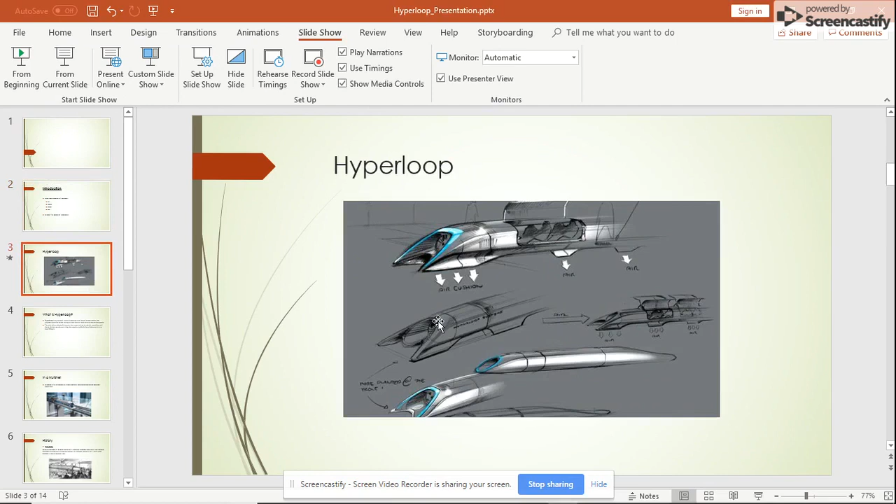Okay, so what are the four modes of transport that we know already? Those are air, water, road, and rail. Now let's look into the fifth mode of transport, the Hyperloop. This is one of the earliest schematics of Hyperloop designed by Elon Musk. So what is a Hyperloop? Let's answer the basic fundamental question.

This idea is not a very new idea in the sense that from the 18th century, humans have been using pneumatic tubes, or there were proposed ideas about vacuum tubes. But this is new in the sense that it doesn't just use those ideas, it builds on those ideas. So let's look at how this works.

This mode of transport is a proposed mode of transport for both passenger and freight transportation, which instead of using a vacuum tube, it's actually near vacuum - low pressure containers or tubes, which propel the passenger pods or freight transportation pods at almost airline speeds, theoretically close to 500 miles per hour.

Let's summarize Hyperloop. It's basically just a capsule full of people in a low pressure tube, which goes really, really fast. That, in a nutshell. To understand this completely, we have to go back in time a bit and look at the history of how these capsules were developed theoretically, or how these ideas were developed theoretically.

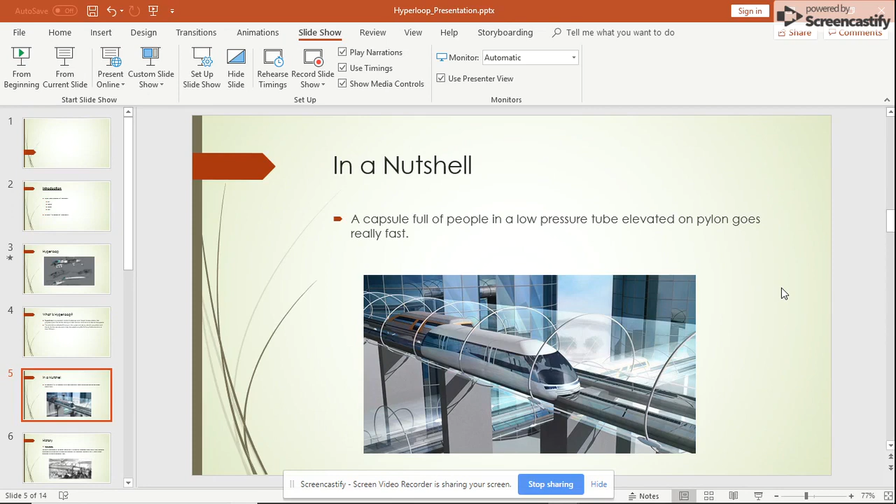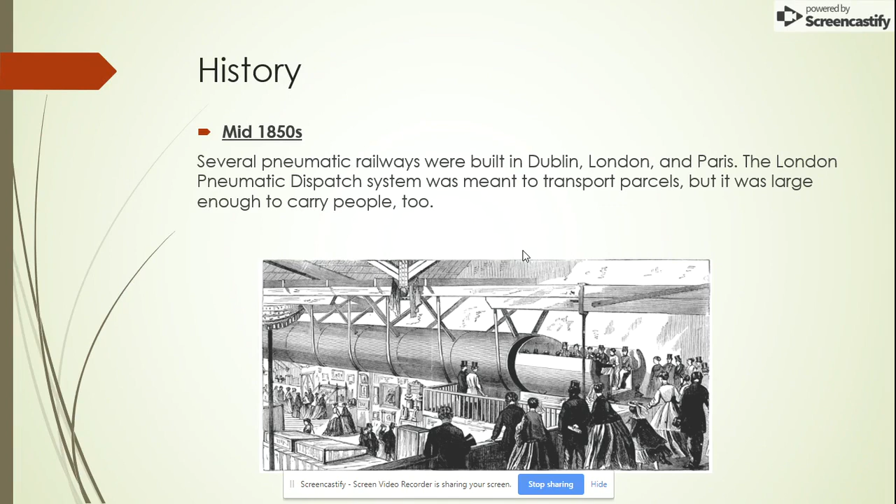Okay, so let's go back in history. Let's look at mid 1850s first. This was one of the very first times when a pneumatic railway system was built in several countries, in places like Dublin, London, and Paris. They were meant to transport parcels first, but since back in the day the technology was not really efficient, the size of the containers were actually large enough to carry people too.

Now let's go back in time - let's move on to the 19th century. There were several versions of pneumatic tubes from mid 1850s to the 19th century, but let's look at one of the major commercial uses for which they were built. By the end of the 19th century, once people were able to master building pneumatic tubes, they built large-scale pneumatic tubes for commercial applications, for transporting mail and other messages.

Now, I've used the word pneumatic tube a lot of times by now, so let me step back and explain what a pneumatic tube is. A pneumatic tube would be a container very close to vacuum, which uses compressed air for moving solid packages from place to place. It differs from a regular tube in the sense that usually when we say tube, it's used to transport liquids. Pneumatic tubes instead were used to transport solid packages like mail, etc.

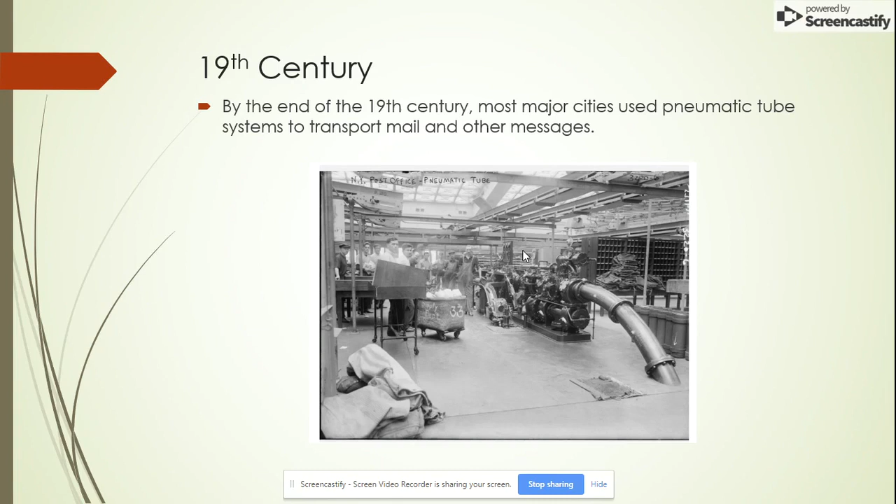And this is the 20th century - one of the very first models of using a tunnel or tube for large-scale transportation was theoretically proposed by a NASA pioneer called Robert Goddard. His idea was to create vacuum tubes. He theoretically wrote a paper on this idea in 1910 and estimated that if we were able to build a vacuum tube from Boston to New York, we would have been able to transport people in about 12 minutes, according to his theory.

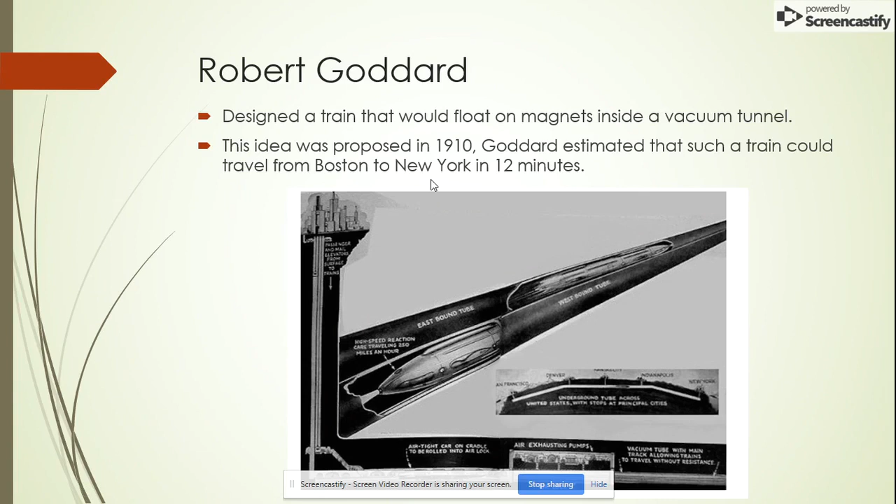Now moving on to the early 2000s, the next major application or proposal was put forward by ET3, a commercial company, which designed a small-scale pneumatic and maglev train, also built on similar principles to the pneumatic tubes we discussed earlier.

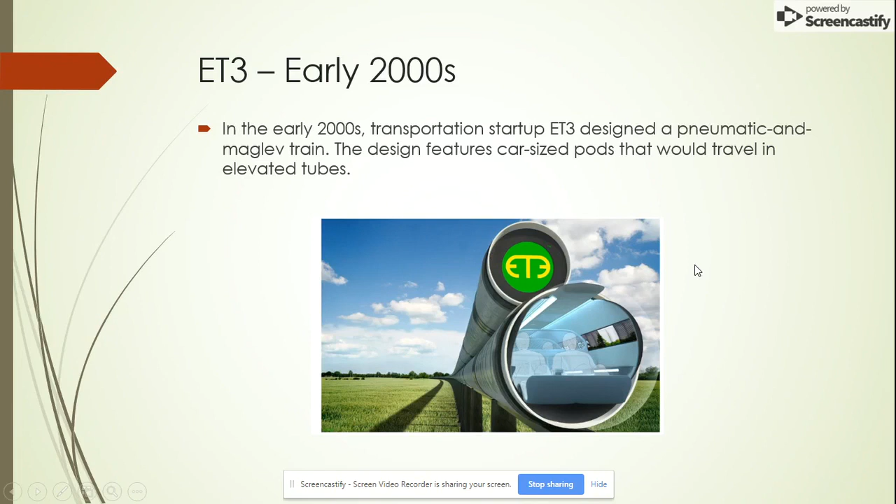So as you can see in the picture, the design features car-sized pods that would travel in elevated tubes. So it would not be on the ground; it would be at a much higher, elevated level than the ground.

Okay, now moving on to the present—let's say early 2012, 2013, when Elon Musk wrote his first white paper on Hyperloop. So essentially, we understand the history of how humans have evolved this technology, using compressed air for transporting mail, and then trying to prove that vacuum tubes would be a better alternative for transporting people from place to place.

So Elon Musk suggested this idea—he was inspired by all these concepts—using low pressure tubes to attain very high airline speeds, theoretically close to 500 miles per hour. That's because since we're using low pressure containers, there would be very little aerodynamic drag, which allows us to attain such high speeds.

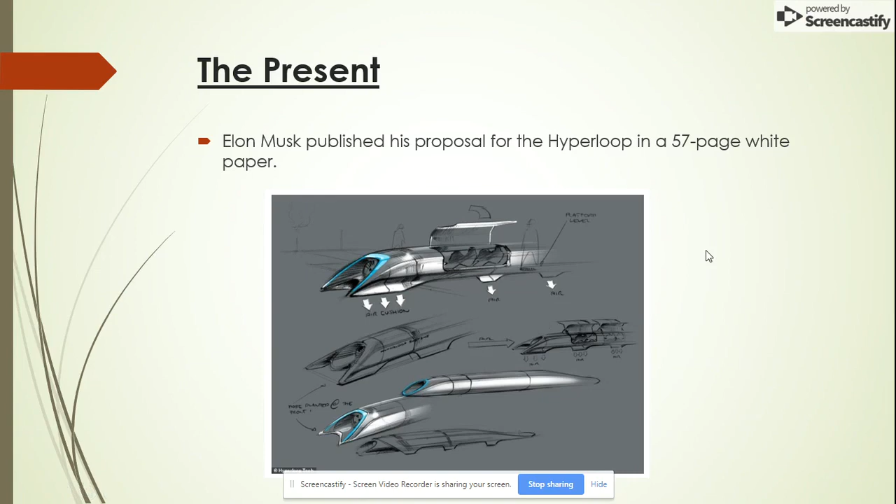To use an analogy in terms of road transport, very low aerodynamic drag is like very little friction. So essentially, we'd be going from Flintstones to Jetsons, attaining such high speeds. We've been evolving in terms of the transportation industry, moving on from this to this.

Okay, now let's look at the motivation behind developing this project. In about 2012, 2013, the Californian government accepted a proposal for a high-speed rail system between Los Angeles and San Francisco with about a 68.4 billion dollar budget.

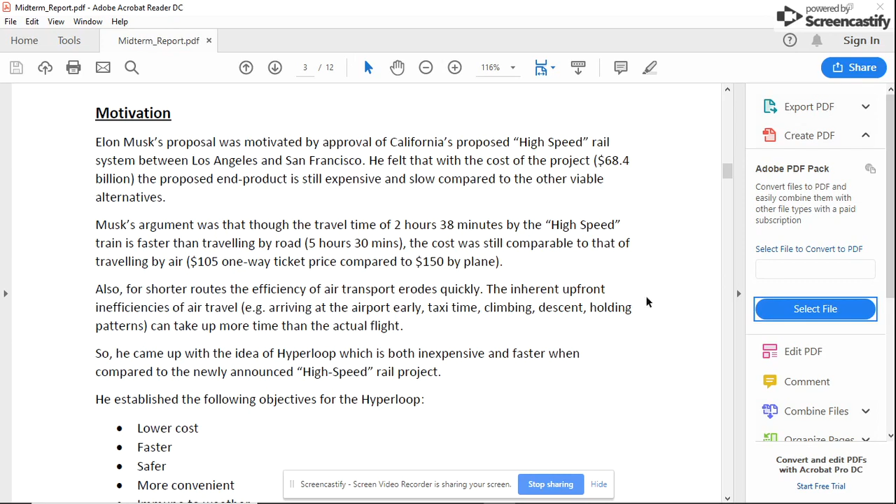After this was accepted, Elon Musk argued that with a travel time of about 2 hours 38 minutes by high-speed rail—although it appears faster than road transport, which is about 5 hours 30 minutes—the cost was still comparable to traveling by air. That is, you'd pay around $105 as compared to $150 by plane.

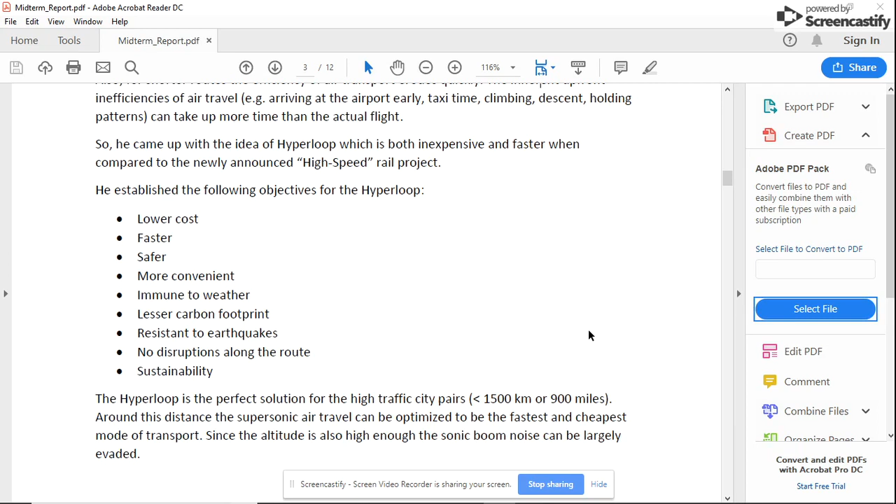So he argued that with a similar or much lesser cost, we could develop a much faster transportation system using low-pressure air containers, which reduces aerodynamic drag, and also wouldn't hinder the existing highway system because you could build this Hyperloop at a much elevated level.

So he established the following objectives for Hyperloop: lower cost, it has to be faster, it should be safer, more convenient, immune to weather—especially earthquakes—and have a lesser carbon footprint with no disruptions along the route.

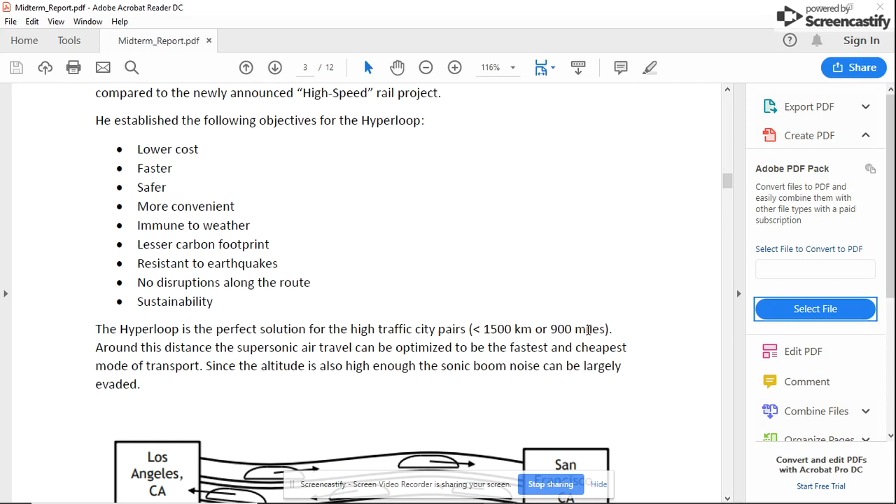This is explained by the fact that you won't disrupt anything. To build a rail, you have to disrupt the ecosystem and disturb the land where you lay the railroad, developing the railway system. Whereas for Hyperloop, you just use pylon levels and build tubes on top of them at a much higher elevated level, so it doesn't disrupt anything.

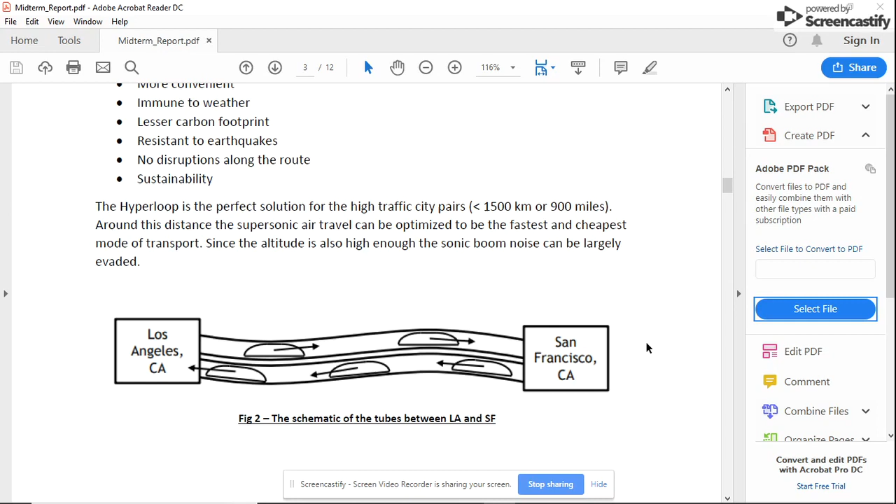And also sustainability—Elon Musk suggested in his first proposal that since there are solar panels built on top of these tubes, the whole Hyperloop can be self-sustainable. This is one of the schematics between San Francisco and Los Angeles, the first one developed.

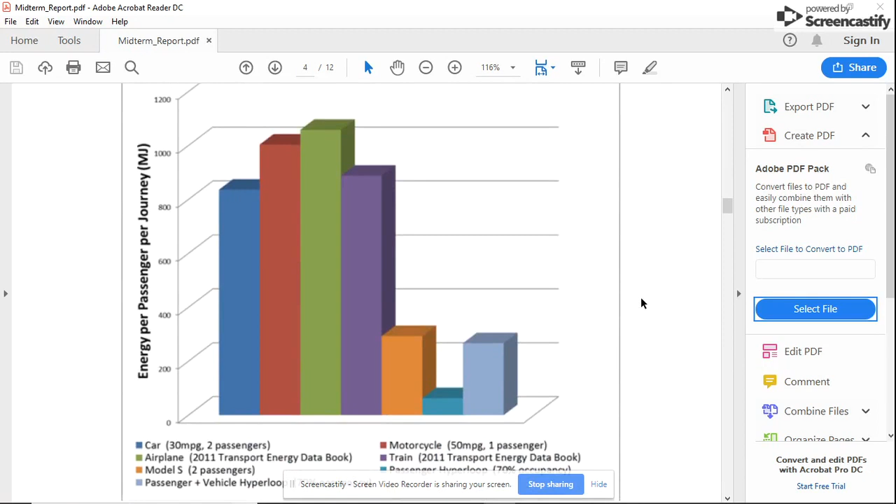Let's look at one more argument of his—if you look at the energy consumed per passenger, this graph explains it for the existing modes of transport: car, airplane, Tesla Model S, Hyperloop, train, and motorcycle. Of course, Hyperloop is still theoretical and a proposed mode of transport.

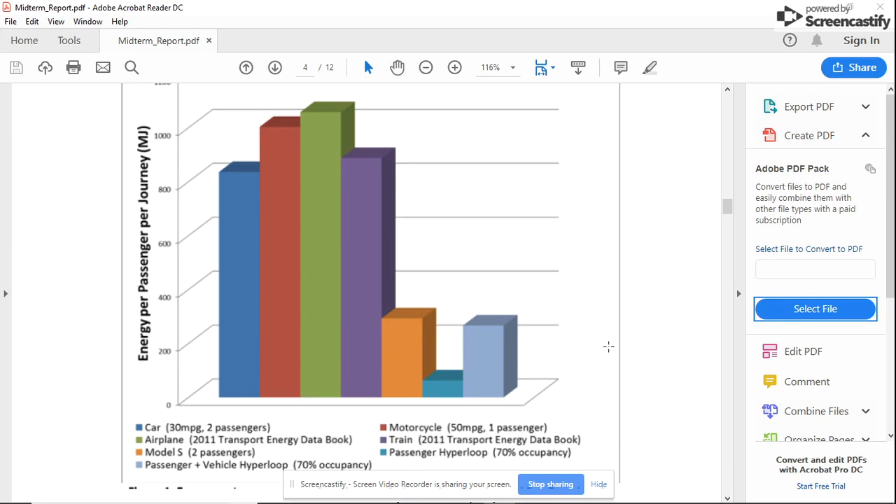If you look at it, the least amount of energy is occupied by the Hyperloop. This also proves that it's a much better mode of transportation in terms of energy consumed and lesser carbon footprint.

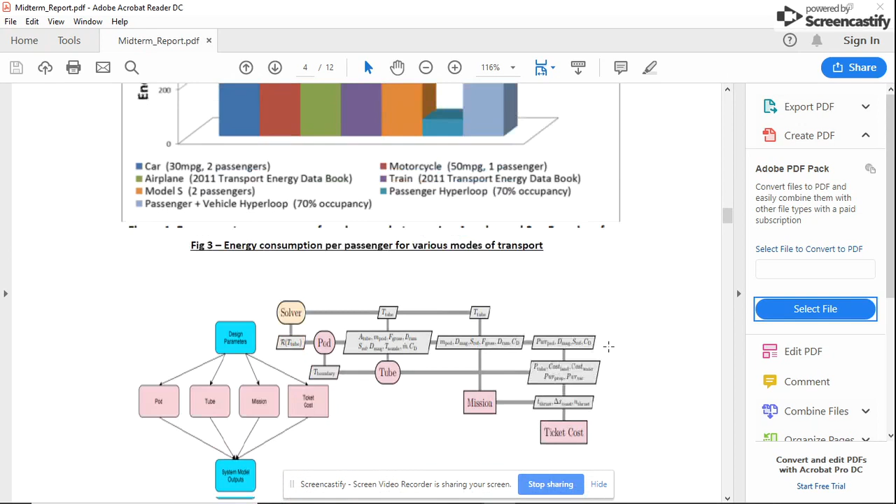And this is the top-level schematic of the Hyperloop. If you look at the design parameters, we need the pod, the tube, the mission, and the ticket cost.

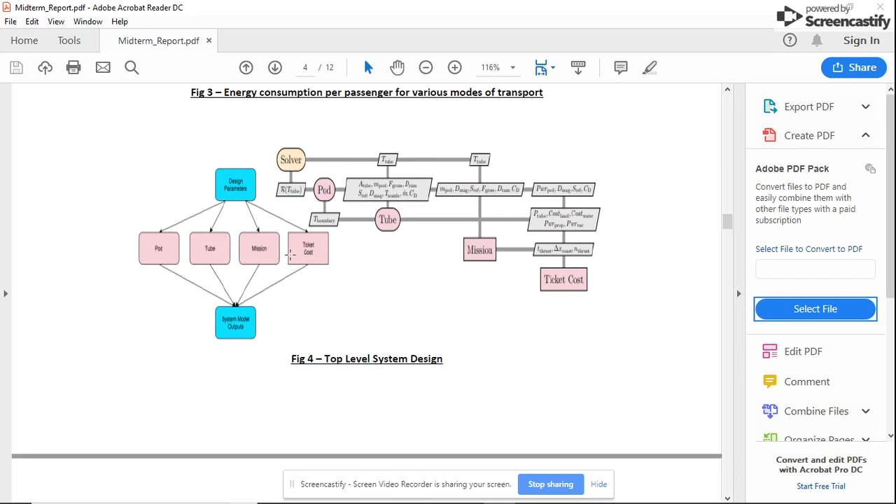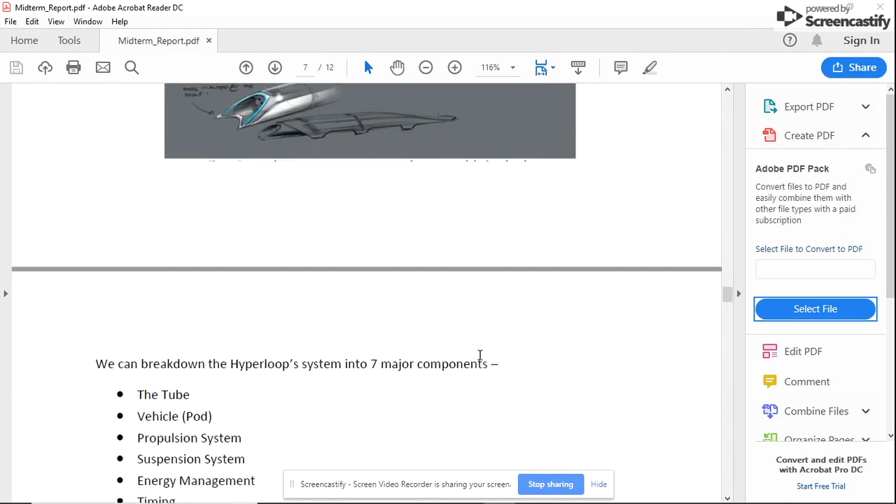Okay, now let's look at the working principle of Hyperloop—the idea and the basic working principle. We can break down the Hyperloop system into 7 major components, as you can see here: the tube, the vehicle or pod, the propulsion system, the suspension system, energy management, timing, and the route.

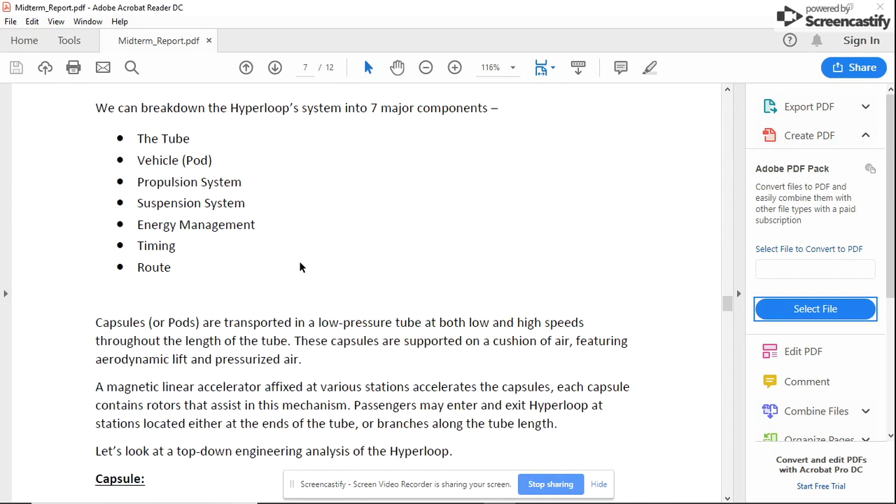Now, to sum it up—I'll explain these things in detail later—these pods are transported through a tube mounted on pylon levels, and the tube is built on the pylon levels, which also has solar panels on top of it.

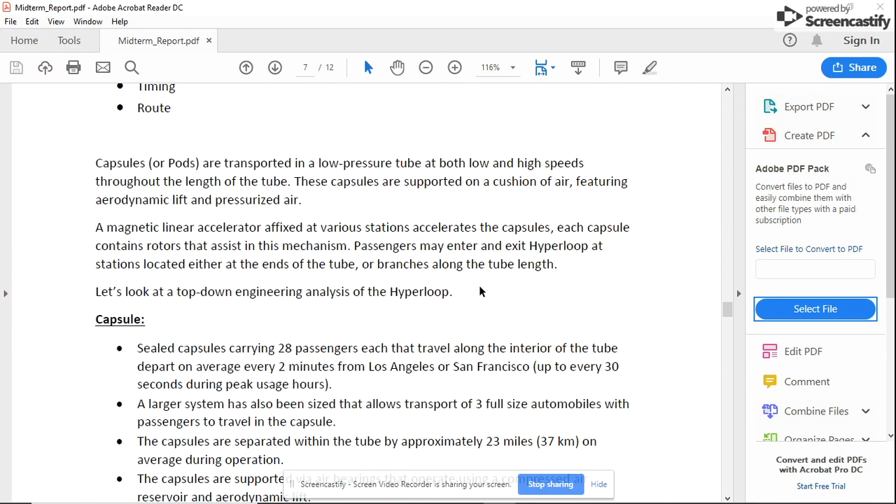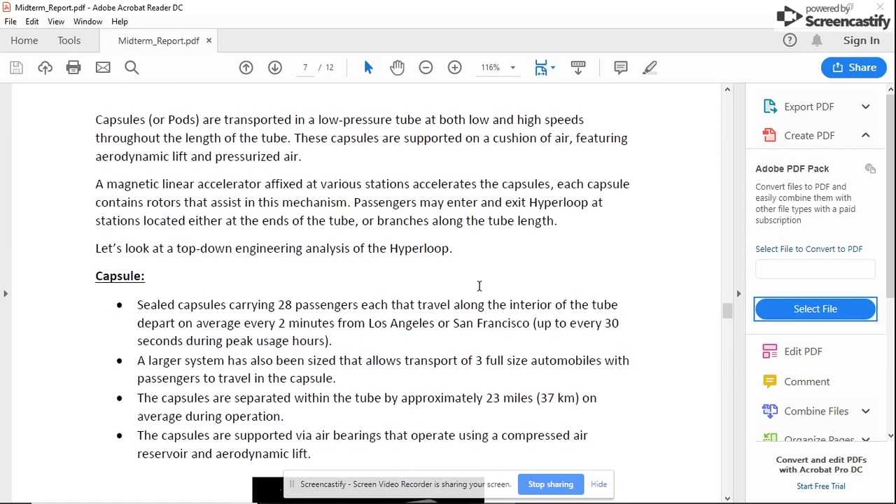So these capsules are transported in this low pressure tube at very high speeds, and also to reduce speed, at a lower speed. These capsules are also supported by a cushion of pressurized air, which has very little aerodynamic drag. So how does it accelerate?

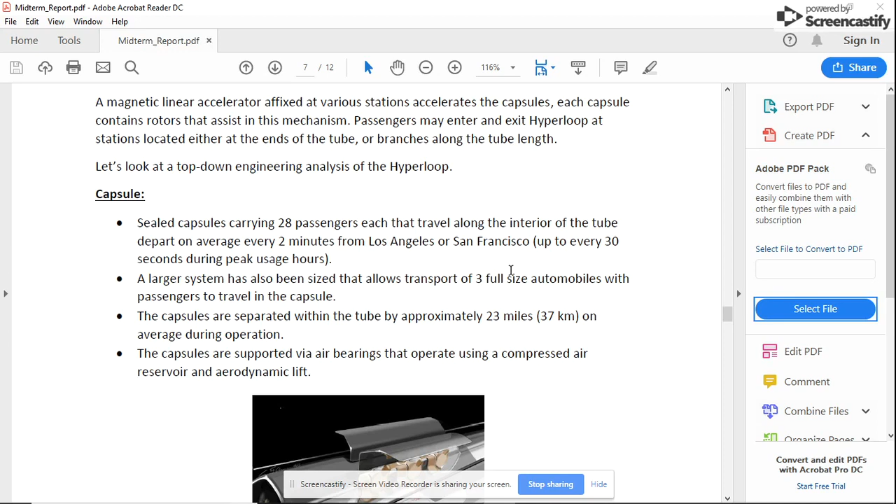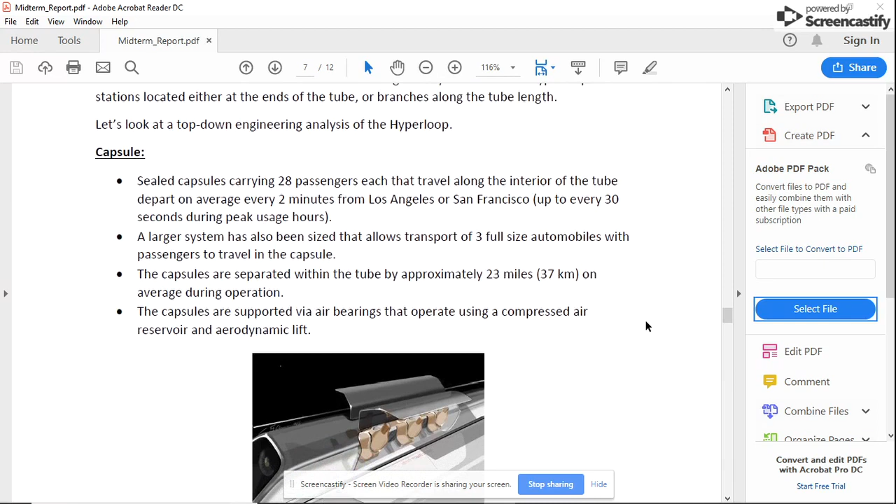A magnetic linear accelerator is fixed at various stations, and these passenger pods have rotors inside them which assist in this mechanism. So let's look at these individual components, a top-down engineering analysis of Hyperloop.

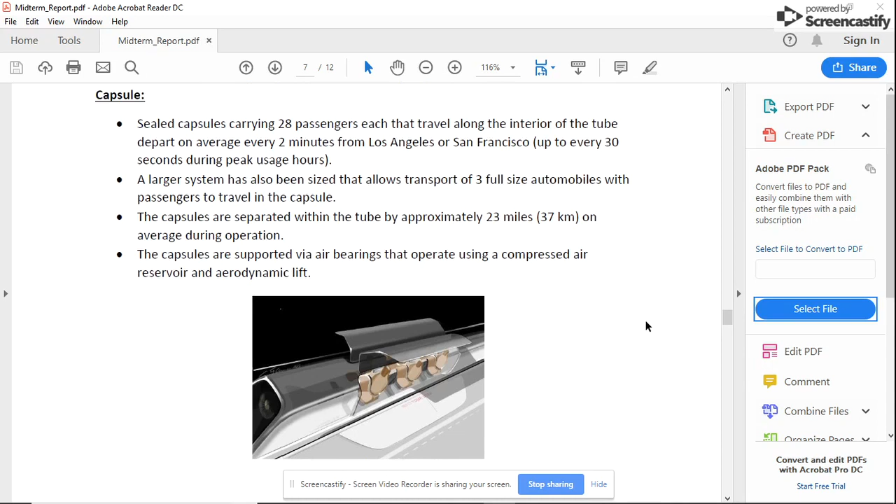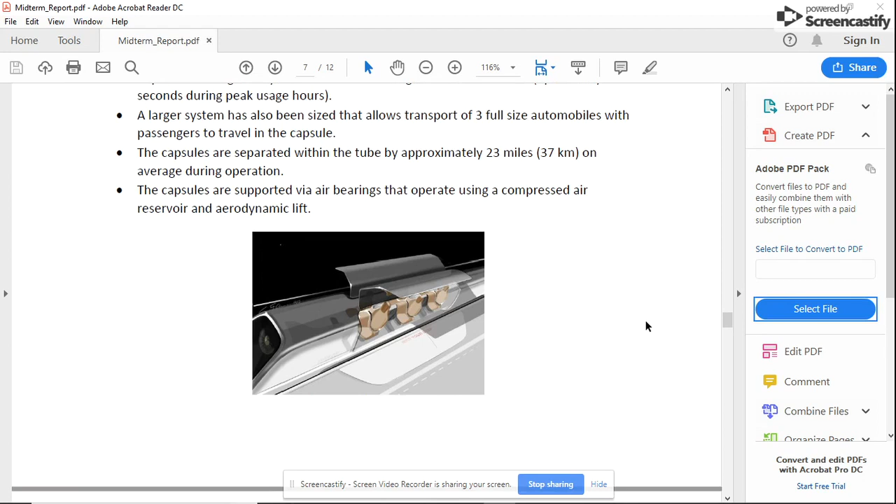First, the capsule. The first proposed design idea was that it could carry about 28 passengers along the interior of the tube, and a Hyperloop pod would depart every 2 minutes from Los Angeles to San Francisco. Each capsule or pod would be separated by about 23 miles on average during operation. The capsules are supported via air bearings.

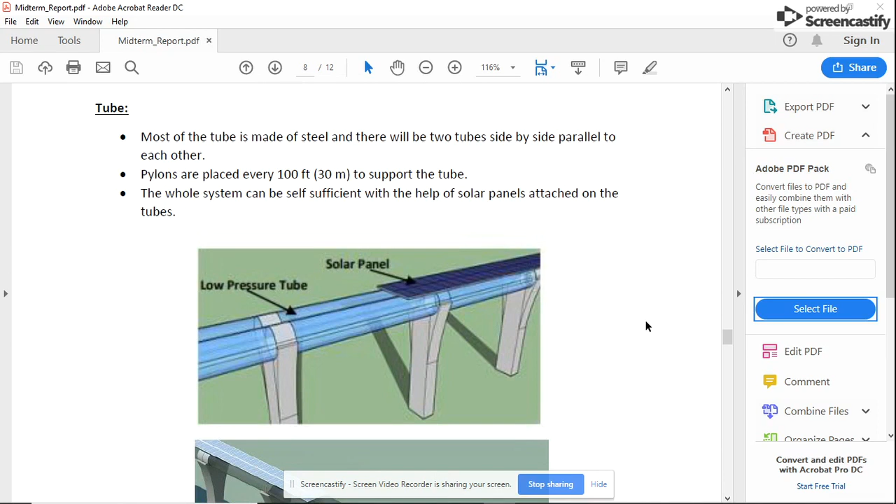Next, the second most important thing, the tube. This tube is made of steel, and in the first track between LA and SF, there are two tubes which run side by side and parallel to each other. The pylons are placed every 100 feet, as shown in the picture here, to support the tube. The whole system can be self-sustainable because of the solar panels attached on the tubes, using solar energy.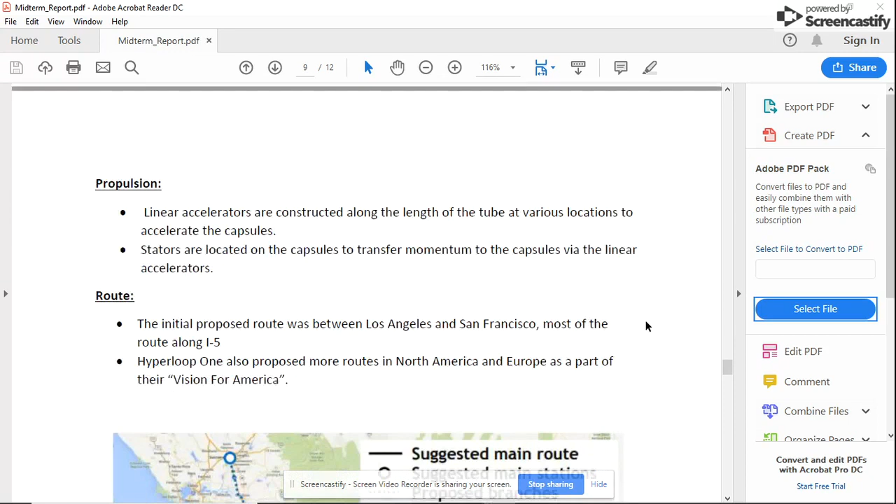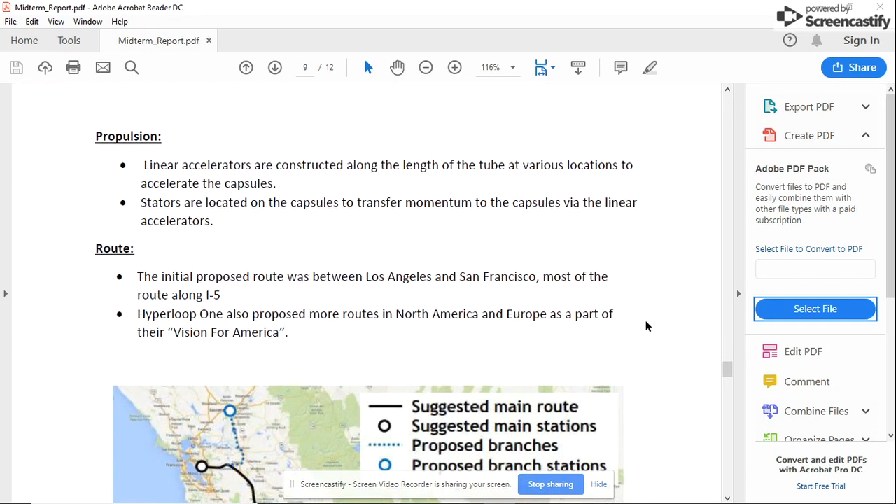Propulsion system. I already explained how the acceleration works, using the stators inside the pod and the linear accelerators at each station along the length of the tube, which assist in the acceleration of the capsule.

All right, now we learned about Elon Musk's vision and SpaceX's initial designs on Hyperloop. I would also like to speak about two more companies, Hyperloop Transportation Technologies and Hyperloop One, which also picked up this idea after the first white paper and started developing initial versions of the Hyperloop.

Last year, Hyperloop One was able to successfully test the first version of Hyperloop on about a 500 meter track, attaining speeds of about 250 miles per hour, which is not yet as quick as proposed in the paper, but it's a really good start, and it is sustainable up to 500 meters, so it can be built further.

Now, Hyperloop One announced their vision for North America in their conference last year. Since they're able to successfully complete phase one, they're talking about the plans of the next phase, building these Hyperloop tracks all over North America by 2030.

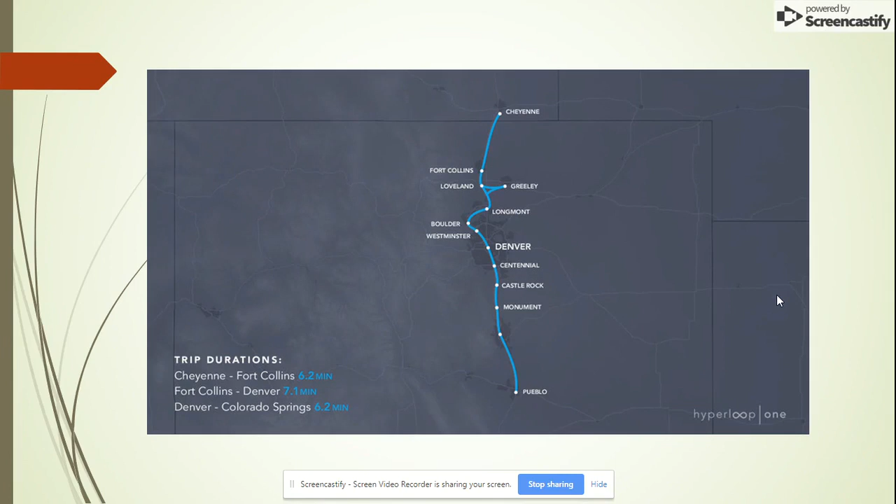This is a really exciting phase ahead, because if you look at it, Boston to Somerset would only cost 5.3 minutes. Similarly, Denver to Dallas, 73 minutes. Chicago to Columbus, about 29 minutes. Fort Collins to Denver in about 7 minutes. Dallas to Austin in about 20 minutes. Los Angeles to San Diego in 12.5 minutes. Seattle to Portland in 17.2 minutes.

So if Hyperloop One, Hyperloop Transportation Technologies, or SpaceX for that matter, any one of these companies is able to pull it off, and make this fifth mode of transport a commercially viable application for passengers, if it suits the demographics, if it works with economies of scale, it is a really exciting time ahead. So I end my presentation here to conclude.

So what we did today was basically understanding the basic principles of Hyperloop and how, throughout the history of humanity, we've been able to evolve the ideas of transportation. This time is really exciting because we are able to achieve about 250 to 300 miles per hour in testing right now, for about a 500 meter track length.

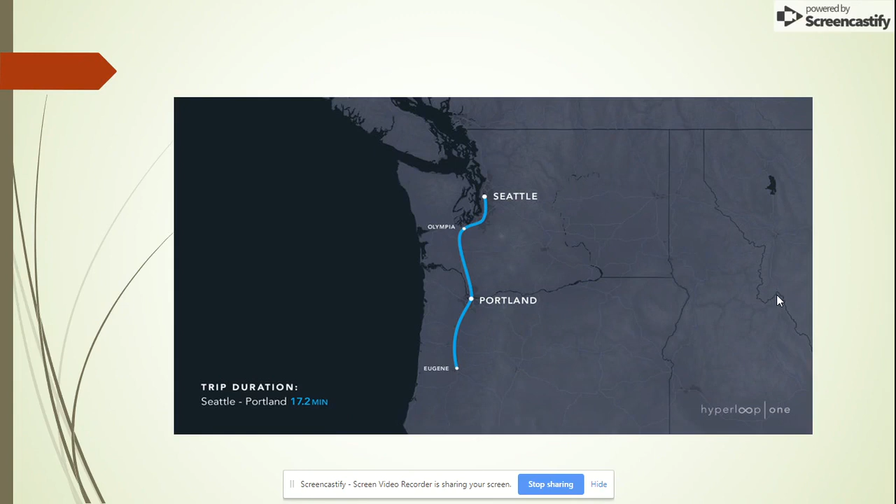SpaceX is actively launching the Hyperloop contest every year, in which a lot of students from prestigious universities take part. It's really exciting times ahead if you're able to build at least a commercially viable application for humans. Thank you.

Till now, we have discussed what Hyperloop is and historically how it was designed, keeping in mind the earlier designs of pneumatic tubes and Robert Goddard's first implementation of vacuum tubes. Now let's discuss how it actually works and the engineering challenges it faces right now. Theoretically, the idea has been developed and reiterated multiple times, and we have white papers from Elon Musk, Hyperloop Transportation Technologies, and Hyperloop One. But practically, where does it stand right now, and what is the future? Let's discuss that.

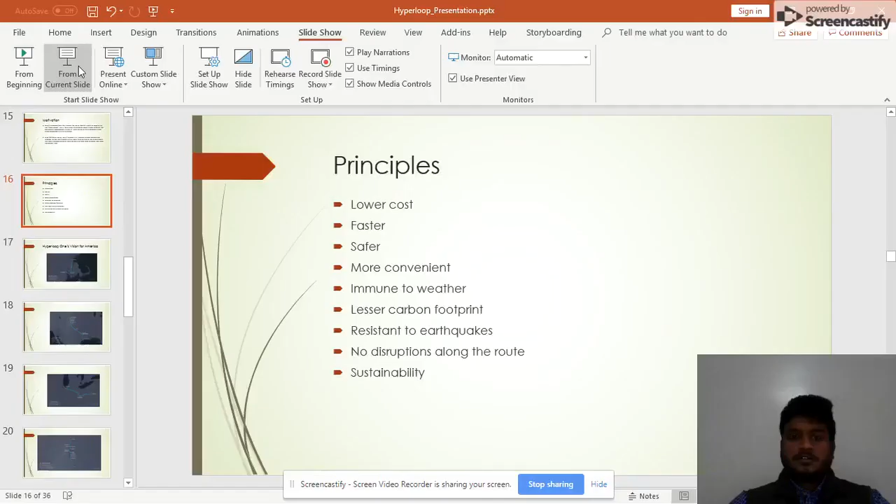Now let's discuss the principles, and then let's see what challenges the model is facing with respect to these principles, and also what the current development stage of Hyperloop is.

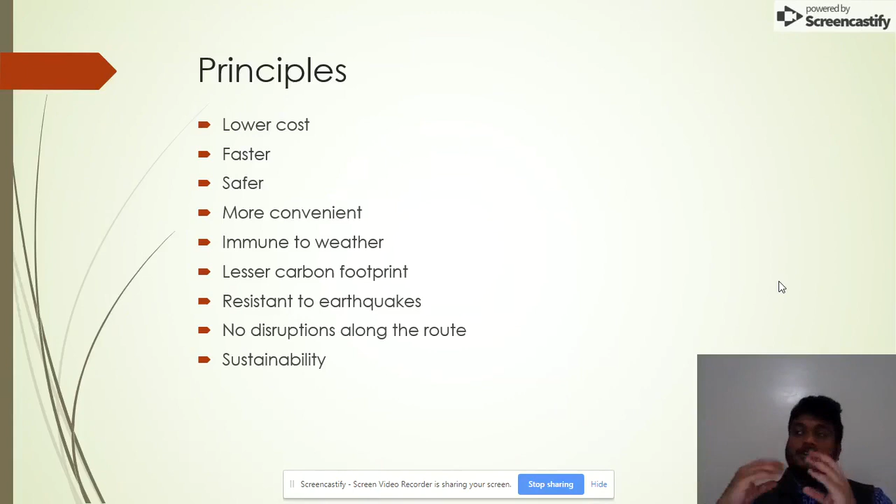Now, when we discussed initially how it compares with existing modes of transport, we said one of the main USPs of Hyperloop is the lower cost, quicker mode of transport, and a more convenient approach, along with a lesser carbon footprint since we're just using air jets to levitate it inside the tube. Across the whole length of the tube there are solar panels attached, so it's much more efficient and contains a lesser carbon footprint compared to other modes of transport which have much higher carbon footprints.

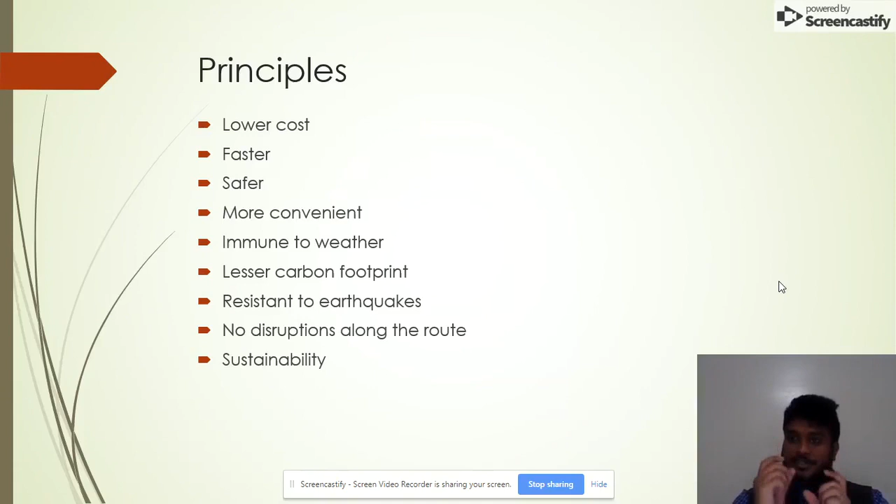Next, it's resistant to earthquakes because the pylons, the stands along the length of the tube, are spaced apart and can withstand tremors. Whenever there is an earthquake of a lower Richter scale, they can withstand that pressure and the tremors onto the tube. And the next point is sustainability, which we discussed.

This is again with respect to how to energize the tube, that is, generating power based on solar energy, which is a renewable source of energy.

Okay, now how does it work? Let's answer the basic question. We can say Hyperloop is a cross between a Concorde, a railgun, and an air hockey table. The reason I say that is the Concorde, when it was invented, was one of the fastest and most revolutionary modes of transport. A railgun uses electromagnetic forces to transport objects, and an air hockey table is known for reduction of air friction. If you've played on an air hockey table, you know how easily you can slide across it, because it has almost no sliding friction.

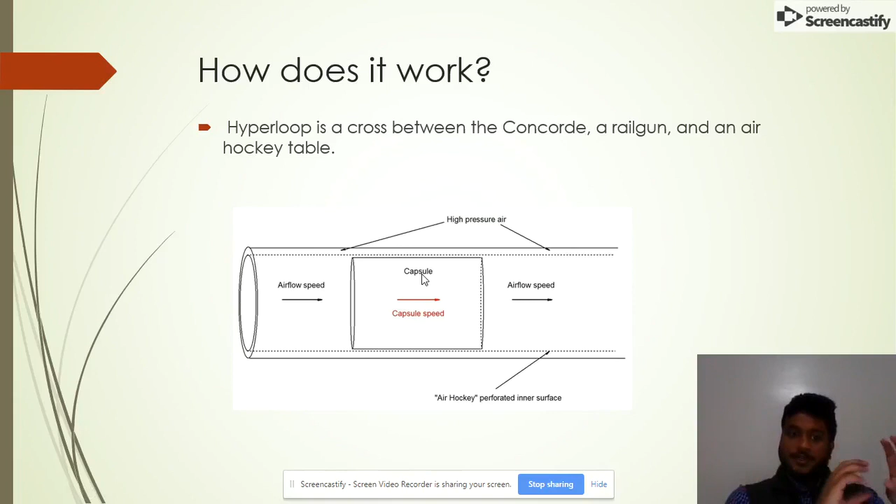The next important detail is that the tube is not exactly vacuum, but does contain a very little amount of air, or highly compressed air. This also acts as a cushion to prevent two capsules from colliding within the tube. I mention this because the journey time is short, and there's about a 10-minute gap, with vessels running at 10-minute intervals. It's very important to prevent collisions, and the compressed air in between the capsules acts as that cushion.

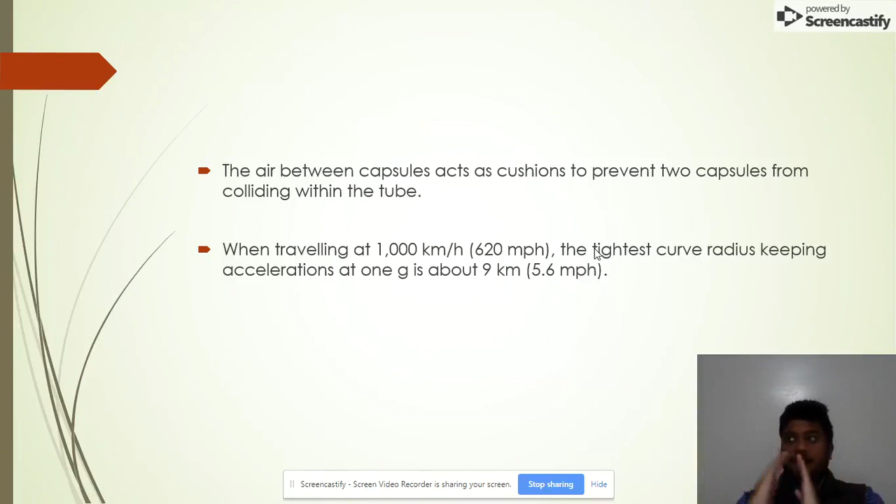The next important point is that we discussed earlier that pretty much the whole length of the track has to be fairly straight, with no curves. That's because the tightest curve radius, keeping the acceleration at 1 g, is about 9 kilometers. So if you want to have a curve, the radius has to be 9 kilometers, which is huge. You can't really have track bending or immediate curves because of the speeds of the vessels.

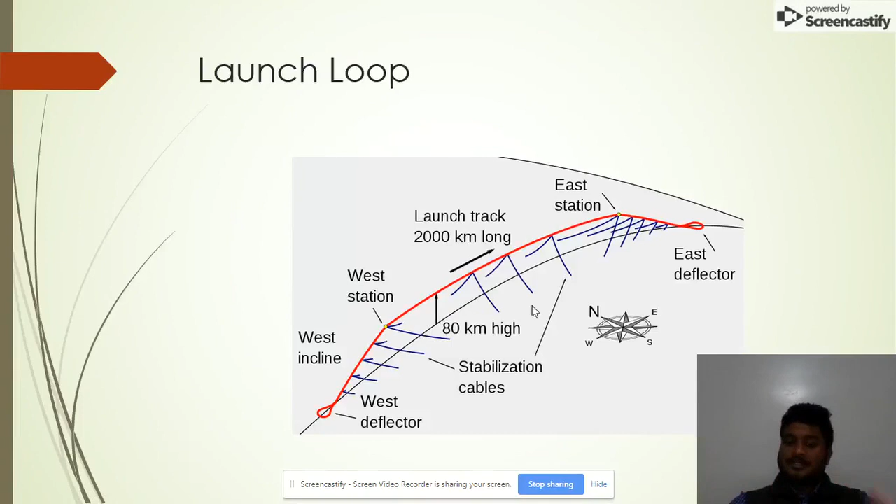Before we discuss the challenges, practical limitations, geographical limitations, and engineering challenges faced at present with respect to Hyperloop, I'd like to go over one of the iterations of Hyperloop called the Launch Loop. You can see there are some differences here—the height of the tube is about 80 kilometers, which is a lot more than Hyperloop. Also, instead of steel pylons erected to support the structure, we have stabilization cables, similar to the suspension cables you'd see on suspension bridges.

Okay, let's go to the challenges now. As I said earlier, theoretically this model works and it's going to revolutionize the transportation industry as a fifth mode of transport. But let's look at the current state of the Hyperloop experiments being performed by Tesla, SpaceX, Hyperloop Transportation Technologies, and Hyperloop One, one of the leading companies in development of Hyperloop.

The current state of Hyperloop One is that they have built a 250-meter tube in Nevada. The length of the tube and the size of the track is about 250 meters, and they've been able to achieve speeds up to 240 miles per hour. This is part of their new goal called Vision 2030, and I'd like to show you a video.

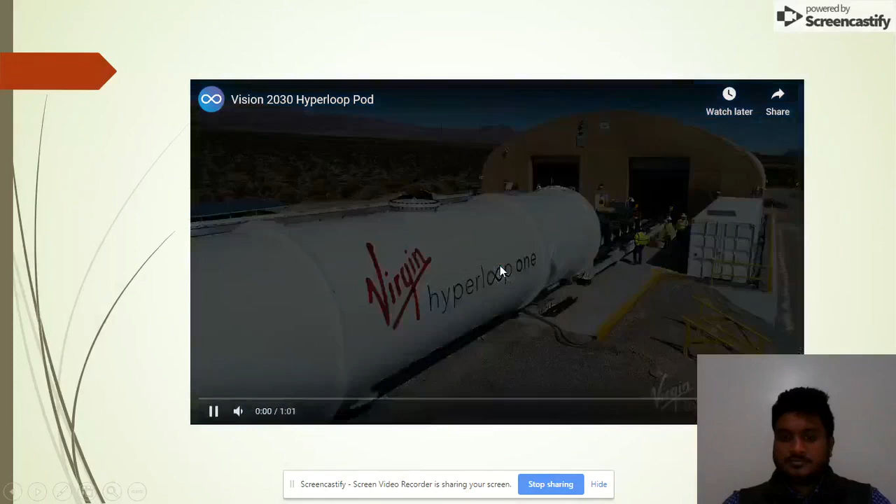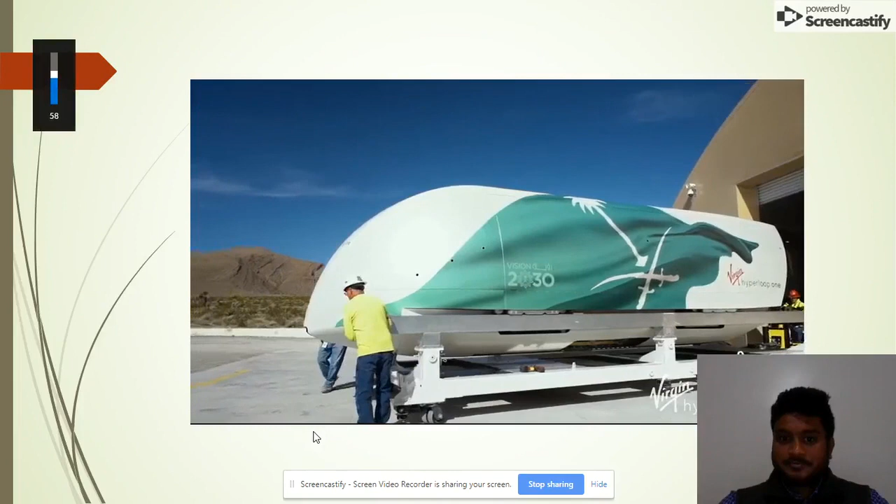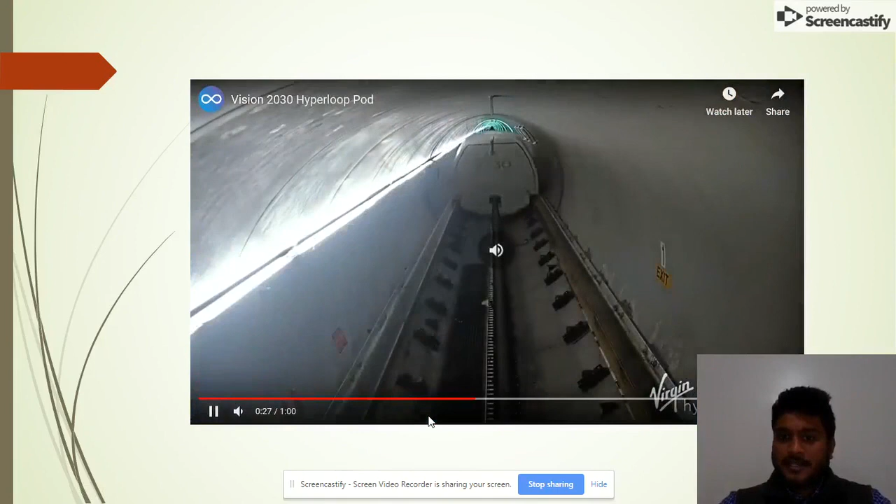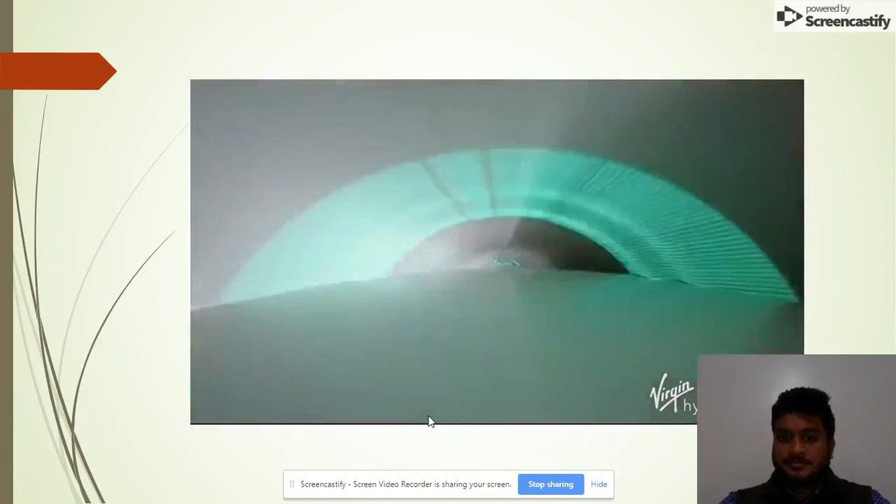This is a part of Virgin Hyperloop One's Vision 2030 in Nevada.

As you can see, their experiments have been successful, and they've been able to successfully accelerate and decelerate the pod within the length of the tube. This video was released as part of their phase one of Vision 2030. Right, so since the size of the track is small, even though the experiment and phase one are successful, the current implementation of Hyperloop is still small scale—there are no large tracks available. So that's the major question: is constructing a perfect tube hundreds of kilometers long, capable of sustaining near-perfect vacuum, even possible?

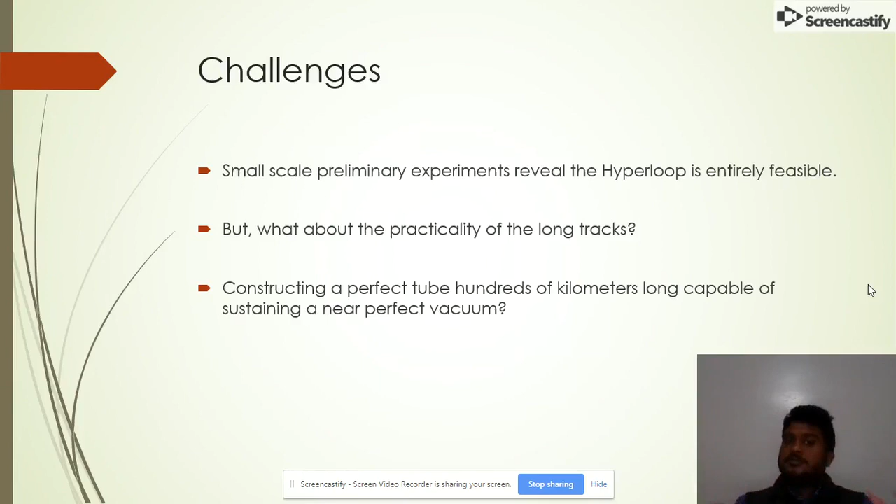Another issue the structure would face, which I'll elaborate on later, is thermal expansion. This is because temperatures change throughout the year, and different parts of the track are exposed to different amounts of sunlight and experience different temperatures. So you'd have the tube expanding, reducing in size, or bending.

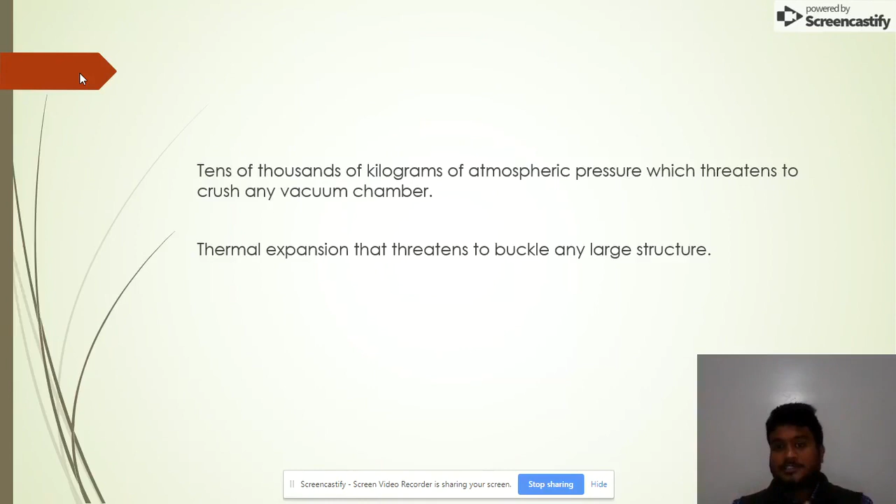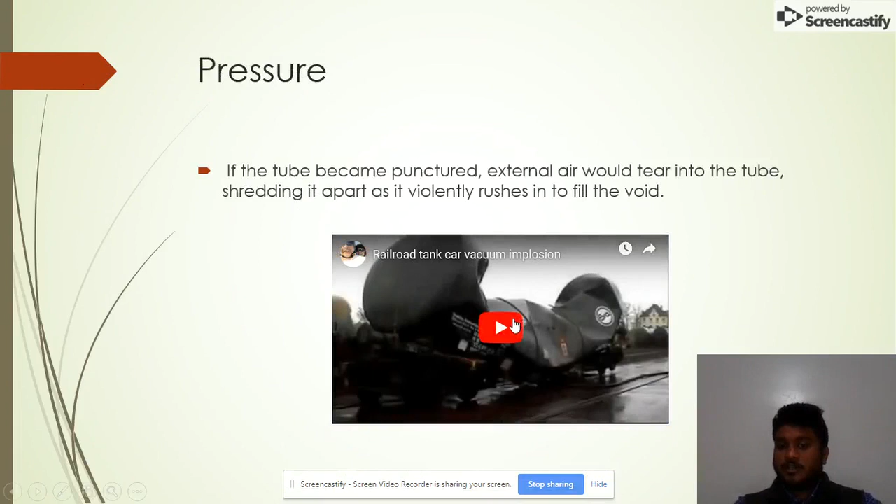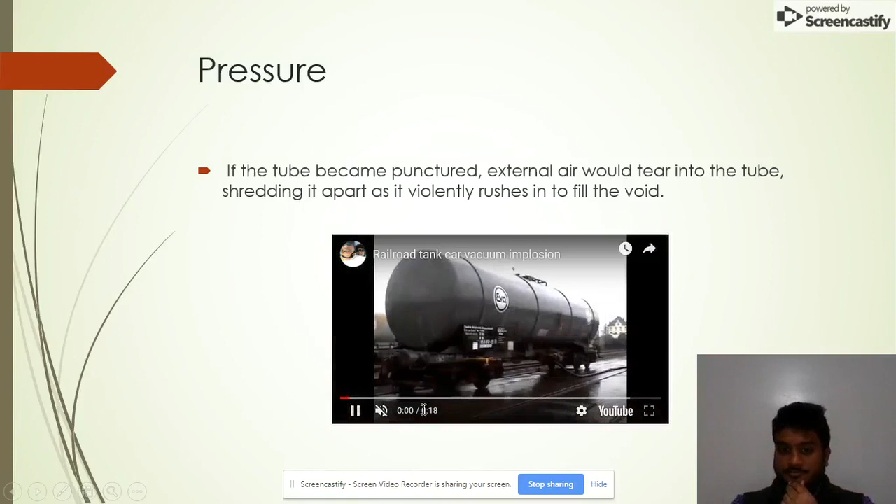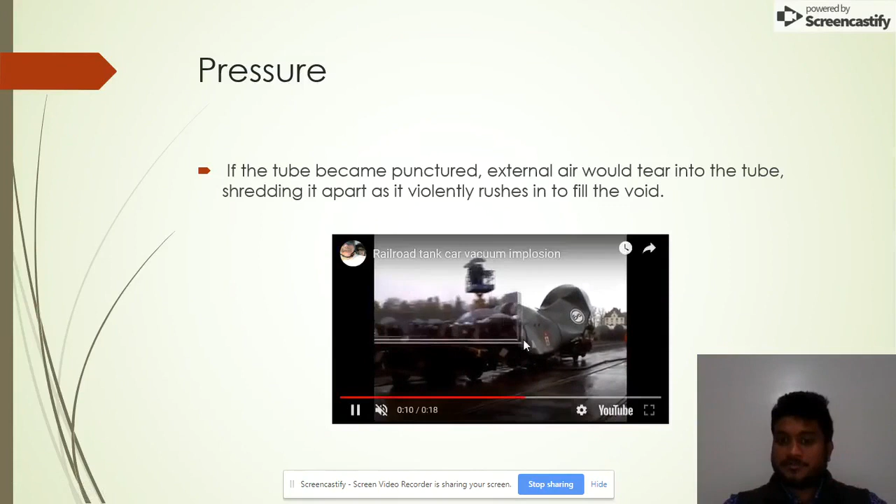Now, elaborating on my first point, I'd like to show a video of what happens when a body experiences such amounts of pressure. This is an experiment performed on a railroad tank car. As you can see, it completely gets crushed due to the lack of pressure. The whole tube gets punctured, and as soon as there's a difference in pressure, the external air tears into the tube and completely shreds it apart.

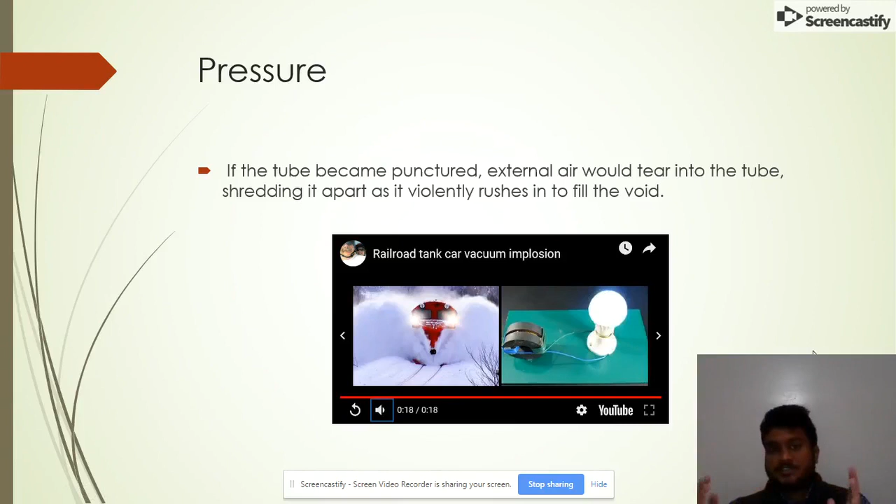So what would be the next major issue? We'd have vessels traveling and arriving at stations at a frequency of 10 to 20 minutes, so there would be constant motion of vessels in the tubes. If there's a collision, and since speeds have theoretically been proposed at around 600 miles per hour—but even practically we've seen speeds around 300 miles per hour—at those speeds, collisions would be completely fatal and would also result in spontaneous decompression.

I'd like to show an example performed by Purdue technology students, in which they accelerate and show how a ping pong ball—completely non-lethal—can become lethal due to the decompression of air when it attains supersonic speeds.

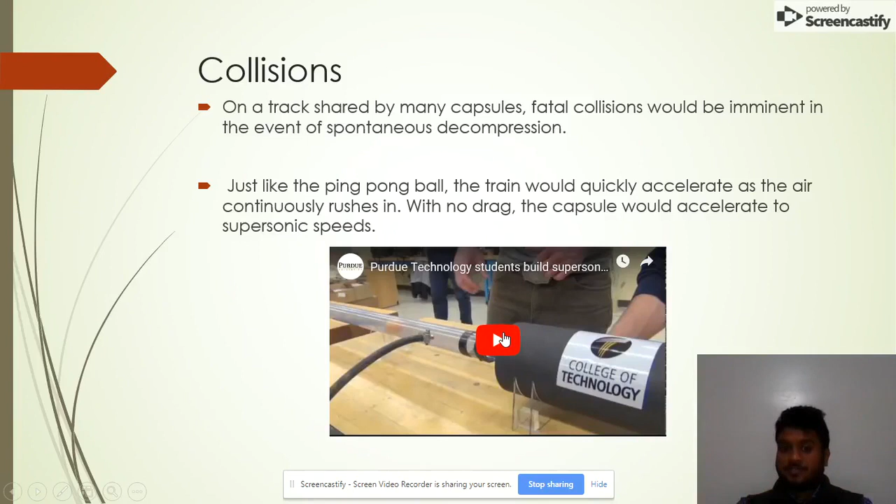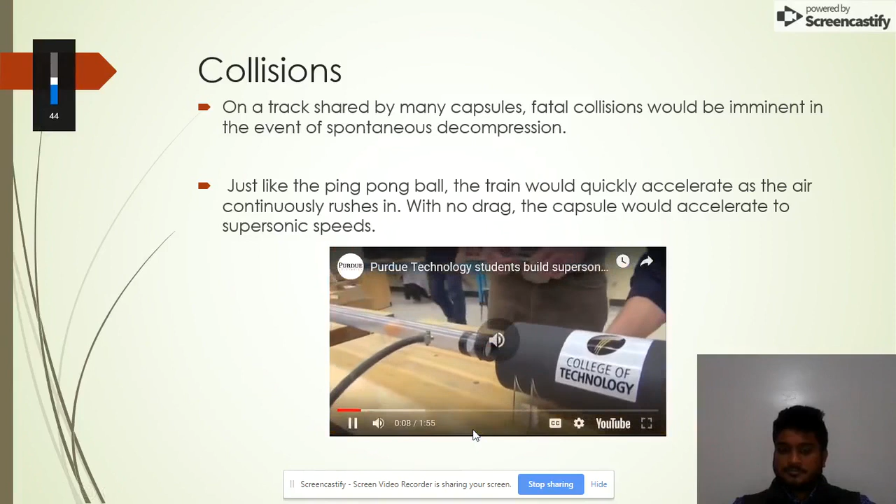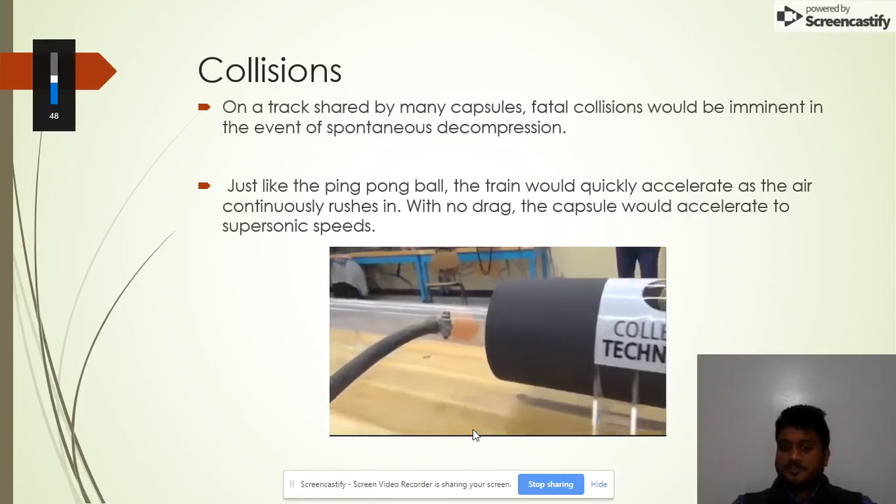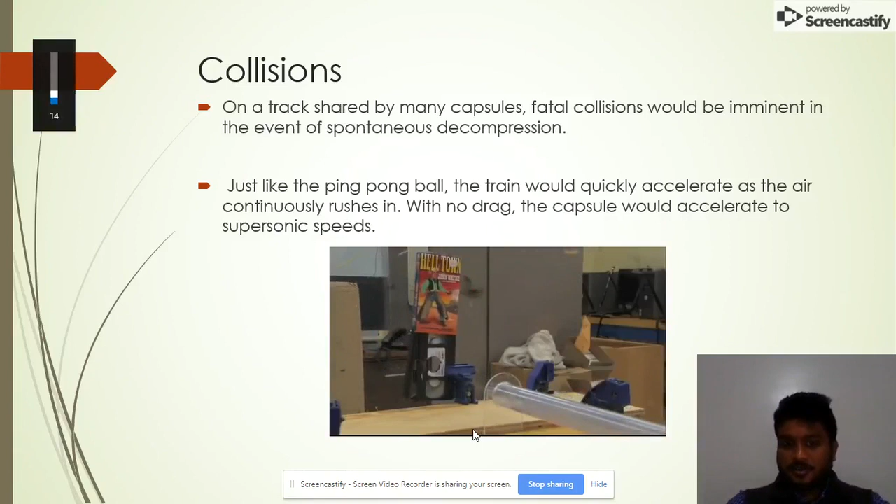Yes, so they take an example of a supersonic wind tunnel. As you can see, they're drawing the air out, and creating almost a complete vacuum in the vessel. The pipe you see here is almost vacuum, as you can see.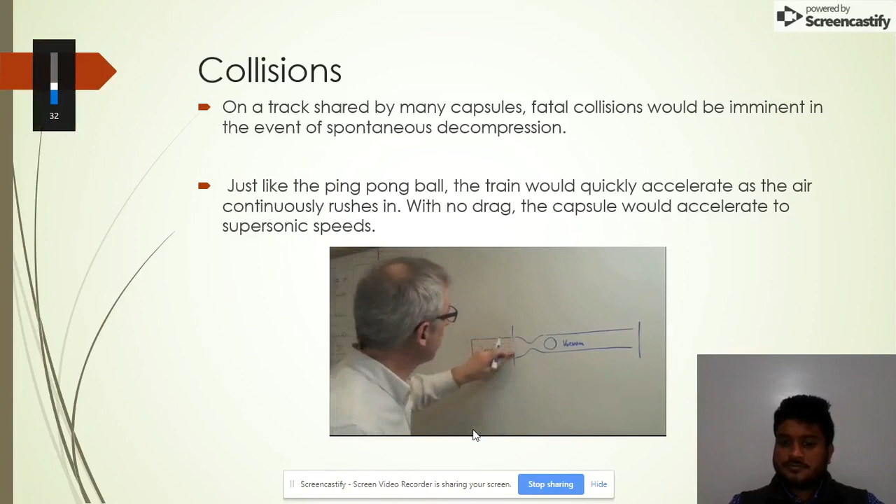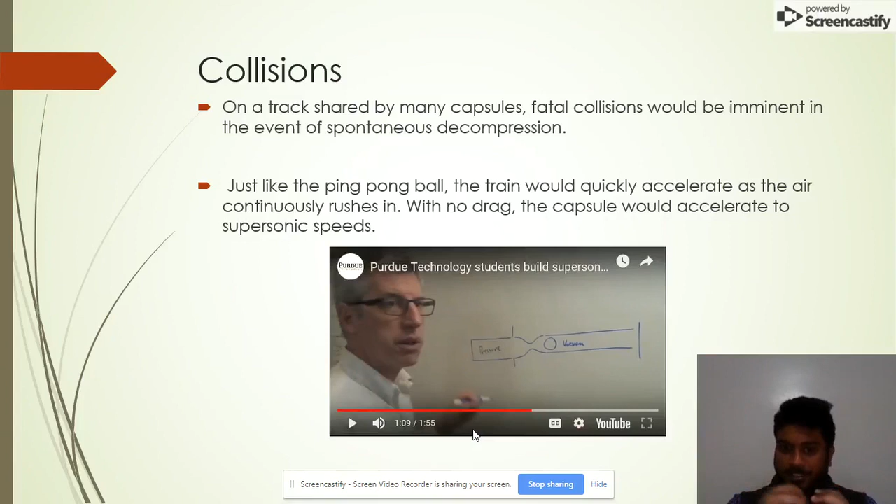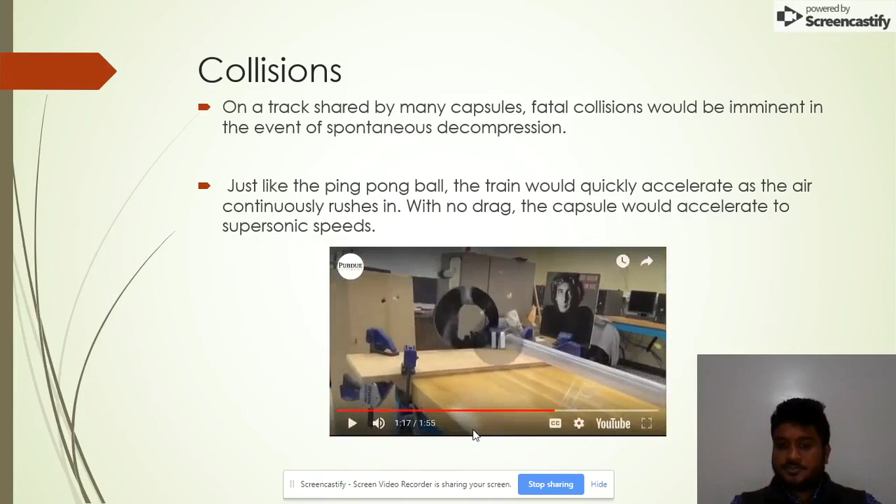As I described earlier, even in the previous example we saw, we have almost no pressure on one side and very high pressure on the other side. So as soon as you expose any object to a difference of pressure, the air would immediately accelerate the ball, and the ball would attain supersonic speeds.

As you can see, it can be completely lethal. The next challenge for the engineers is thermal expansion, which as I said earlier, I would elaborate on.

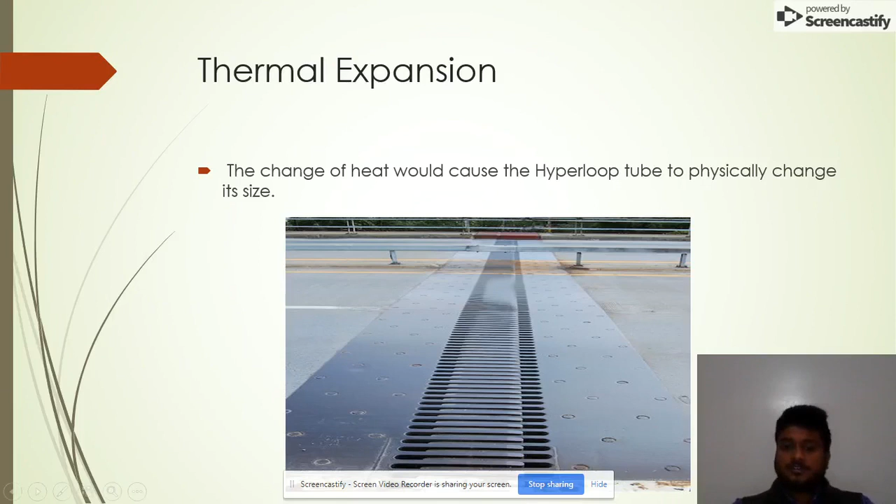The change of heat or temperature would cause the Hyperloop tube to physically change its size. There are a lot of structures that face this issue, and this diagram is an example of a bridge. As you can see, there is a gap left on either side of the steel platform so that it can expand, and there would be no disturbance in the structure of the bridge even during its expansion. Similar solutions can be applied to the Hyperloop tube.

The next major issue is uneven bending. Now, expansion can be fairly compensated for, or kept in check, with building support structures and leaving some amount of gap within the structures. But uneven bending is one of the major issues which is very difficult to counter. That's because...

If we take an example of the whole of North America, the temperatures vary between 0 to 40 degrees Celsius. So given a temperature variance of 40 degrees, the thermal expansion would result in almost a variance of 300 meters, that is, an expansion or decrease in length of about 300 meters.

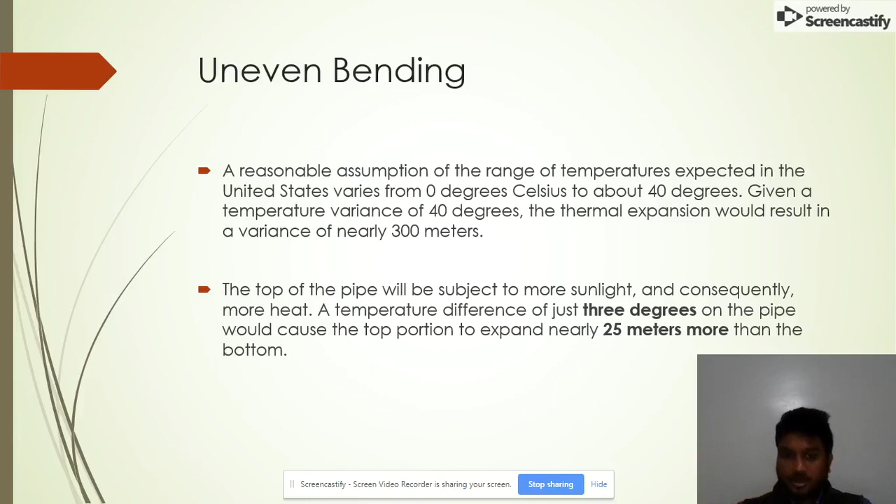Along with that, the top of the tube would be exposed to more sunlight, so more heat there, and the bottom portion would experience lesser heat. So even assuming just a minimum of 3 degrees difference on the pipe, that would cause the top portion to expand 25 meters more than the bottom portion, which causes bending in the tracks.

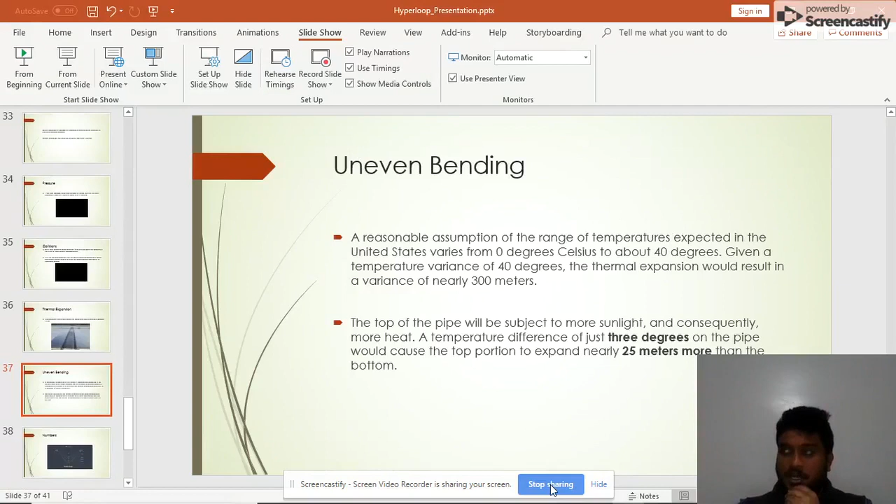So as you can see, there are a lot of technical and engineering challenges for it to succeed. But with thorough research and due care, all these challenges can be accomplished.

Now, before I conclude my presentation on Hyperloop, I would just like to skim through a few numbers to give us a good idea of what kind of impact Hyperloop is going to create in the transportation industry.

Now, these are diagrams from the Virgin Hyperloop's website, where they ask you to specify a source and destination, and they give you these specific numbers as part of their Vision 2030.

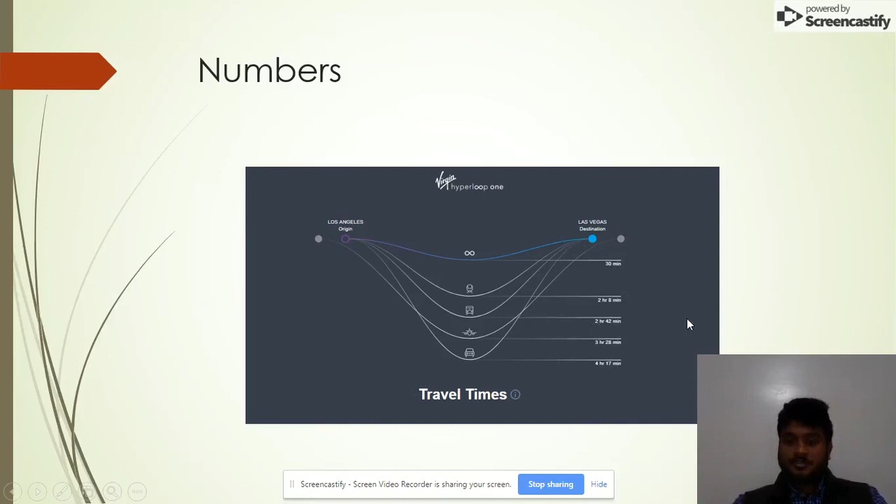So, if I selected Los Angeles as my origin and Las Vegas as my destination, you can see the travel time is completely cut down. By car, it's around 4 hours 17 minutes. By plane, it's 3 hours 28. By train, it's 2 hours 42. And with Hyperloop, it's just 30 minutes, so you're slashing the travel time by almost 1/6.

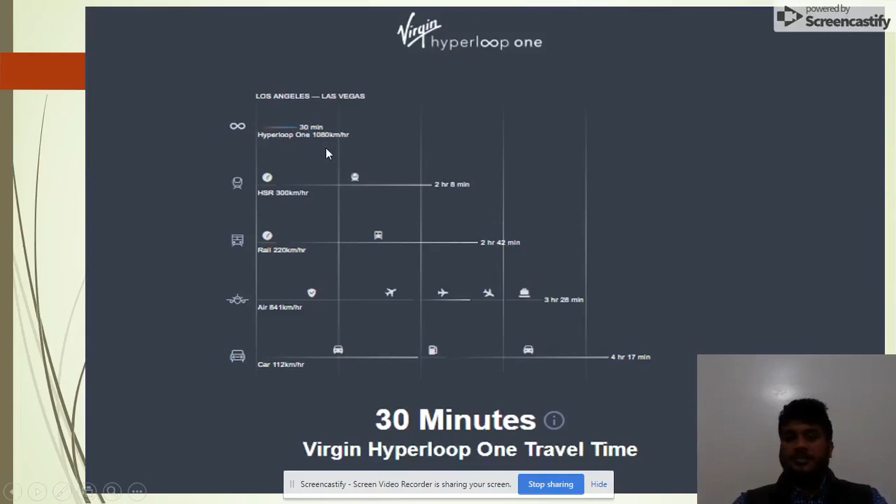So this is the same graph. From Los Angeles to Las Vegas, you can see, if traveled at the speed of 1080 kilometers per hour, you can cover the journey in 30 minutes.

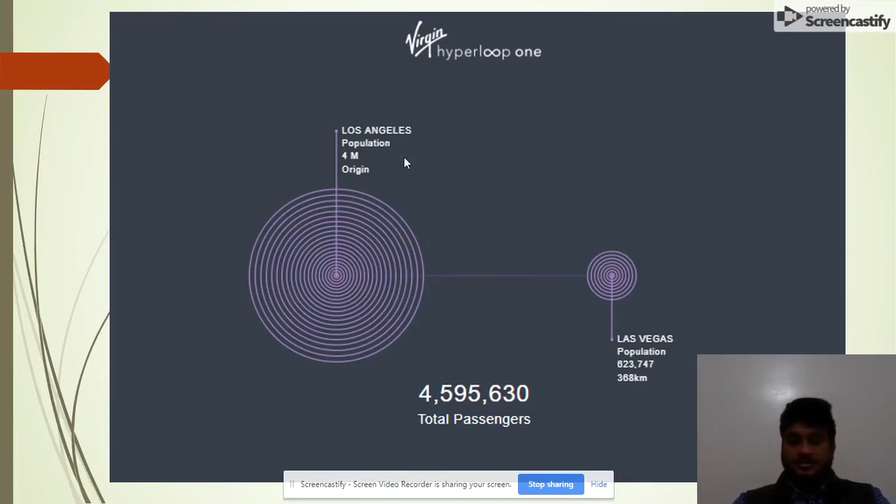So definitely going forward, if we are able to sustain or achieve whatever was proposed theoretically in the next 10-15 years, this is definitely going to be the mode of transport that will revolutionize the transportation industry. So with this, I conclude my presentation on Hyperloop. Thank you.